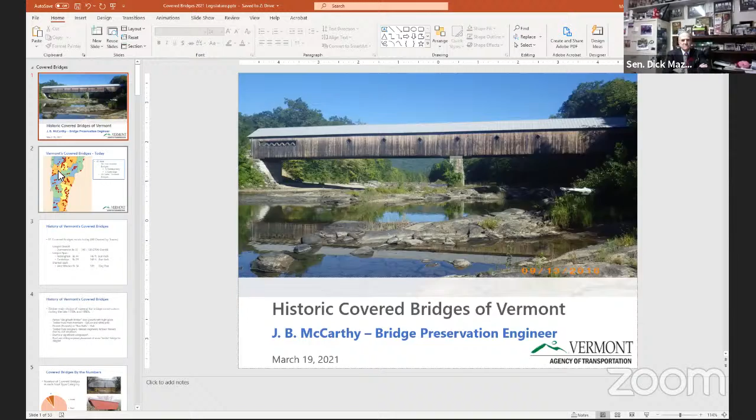Here's the location of the covered bridges around the state, and it's pretty scattered. They're pretty much everywhere, easy to find. You see 81 of them. There's 81 covered bridges. You can Google them and find them, it'll take you right to most of them if you want to see. People want to see them, and a lot of tourists do that.

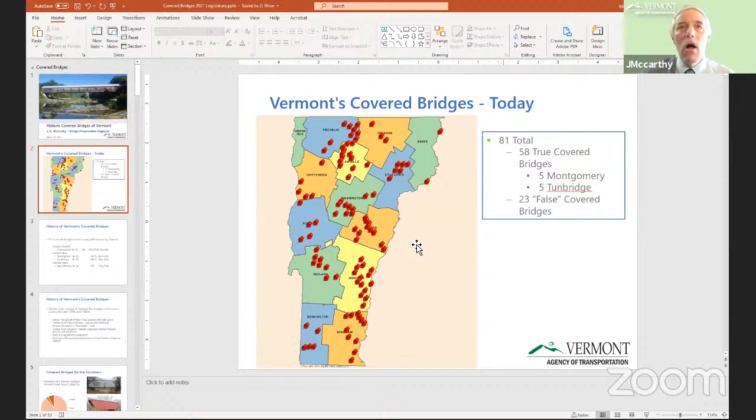We break it into two categories: there's true covered bridges, and what we call false covered bridges, because they have a supplemental force system underneath to carry the heavier loads, because it's on that type of road where the town would like to have that capability. These are all owned by the towns. The state of Vermont does not own any of these.

The longest covered bridge is the one on the front cover, in Dummerston. It's 270 feet. The record was the Townshend covered bridge, I'll show you at the end of the PowerPoint. It was 277 feet, it was closed for a while, it's just been rehabbed, I'll show you a picture at the end. The longest spans are in Rockingham and Cambridge, they're 146 feet, just one span. And the shortest span is a 32-footer up in West Windsor. It pretty much runs the gamut.

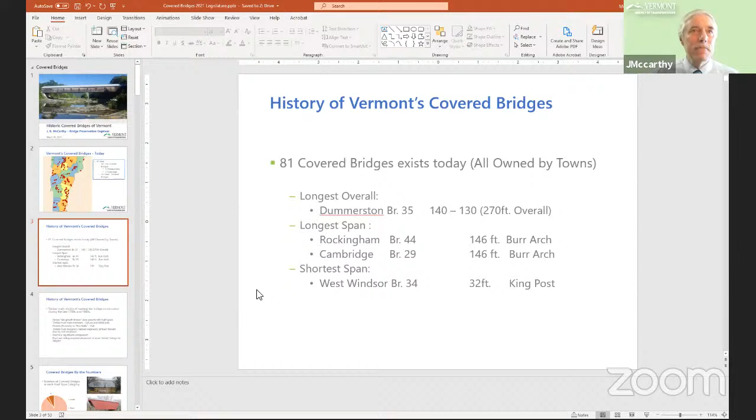These were built, started building these covered bridges and timber bridges in the 1700s and 1800s. There was a lot of good old growth in Vermont, good tight grain, good timber, mainly spruce and white pine. A lot of these bridges still have some of these original members in them. The members were connected with dowels, called tree nails, mainly made of oak. A lot of variety of people built these - timber designers, people that built barns and houses, framers, that type of thing. The railroad, of course, had a lot of timber bridges.

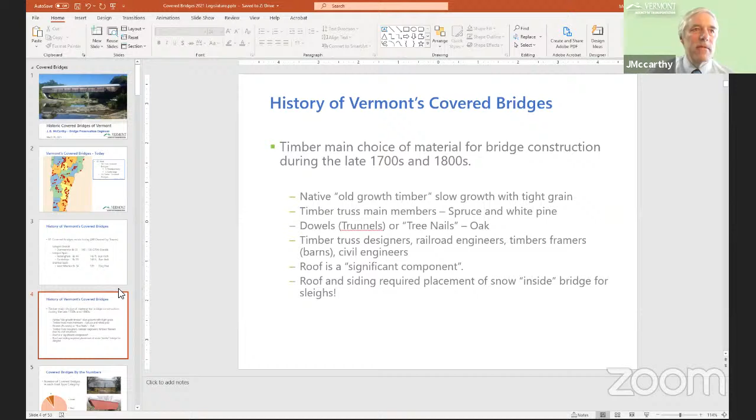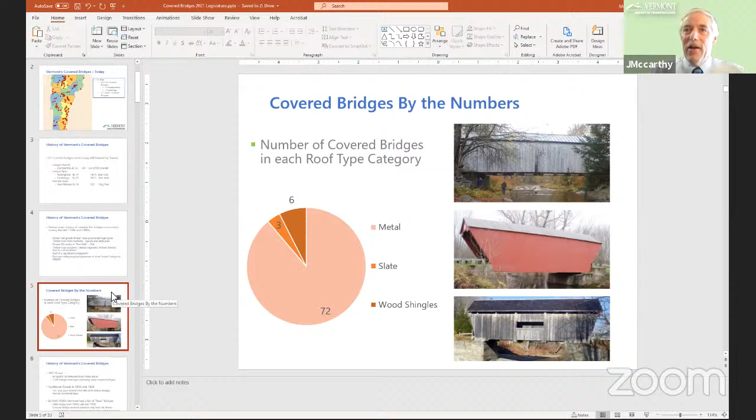I just want to touch on the roof, how significant and important the roof is on these things. It's the main reason these things have lasted - they're protected from the elements, and it makes a big difference on their longevity. Most of the bridges now, we've been able to get the standing seam metal roof on the bridges. The snow slides off, gets the snow loads off of there, and it's rather light compared to shingles, or even a few bridges left with slate roofs. Snow slides off the slate, but the slate's pretty heavy. So the dead load of covered bridges is significant - they're pretty heavy compared to what they can carry, but that's just kind of characteristic of them.

Of course we lost a lot of bridges. There were a lot of timber bridges in Vermont, mainly all of them. Prior to the '27 flood, we lost 1,200 bridges, lost some covered bridges, and had another storm in the '36 and '38 time frame.

So we lost about 300 timber bridges between those two storms. Starting in the mid-1930s or so, we had a lot of new bridges built. A lot of the bridges you see come through the regular program on state highways were built then, and a lot of covered bridges were put back.

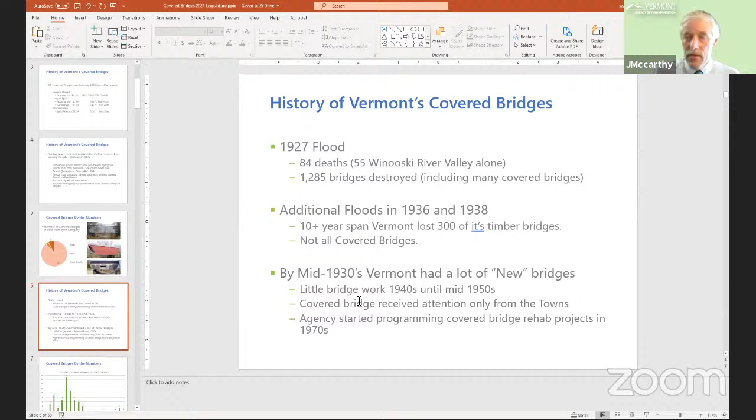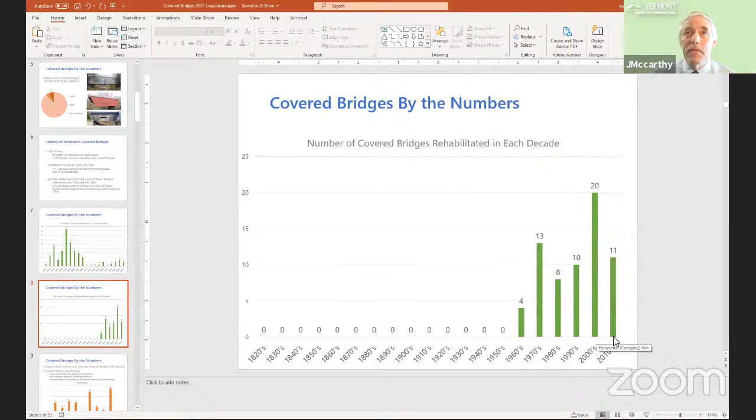And then a sprinkling of new ones throughout the 60s, 70s, and the last few years. These are the number of bridges we've rehabilitated, had projects on since the 60s, and quite a few in the 2000s. There was some additional funding from Federal Highway that really helped in doing this work.

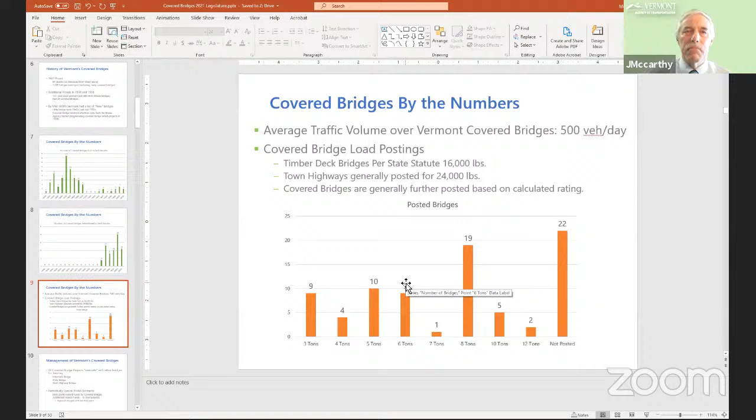These ones at the end that are not posted are the bridges that have steel beams or something underneath because the town desired the standard loading that these roads could take. There's not a lot of traffic on most of these bridges. Another reason they've lasted so long, besides the roofs, is there's about an average of 500 vehicles a day where these bridges are located.

These bridges compete with every other bridge - interstate bridges, state bridges, and other town highway bridges - for funding. They don't have their own separate funding source, which is something we always try to talk about. Maybe we can get a separate line item for these things. But we've done well over the last 20 years, and a lot of them are in pretty good shape.

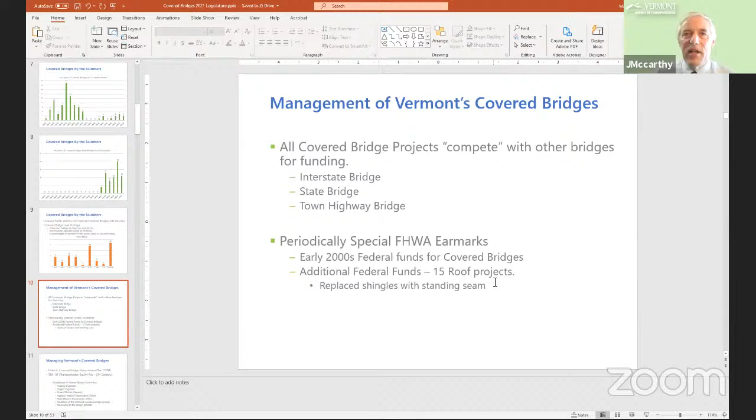We did have some specific money in the 2000s, and we placed 15 new roofs. Didn't do much else besides get a new roof on it, which was a big help.

We have a committee that was set up because of the TEA-21 federal authorization bill. So we have a committee that reviews all projects that come through, made up of our designers, our project managers, the town officials because they own the bridge, a historic preservation officer, and people from the Vermont Covered Bridge Society, which is pretty active. They have probably the best record of the covered bridges out there and what's going on with them.

So they get involved. We meet early on, and the project engineer and designer tells us what's going to happen, and we all agree. We don't vote on things - it's not that hard and fast, but we have some lively discussions and come to a consensus. And I chair that committee.

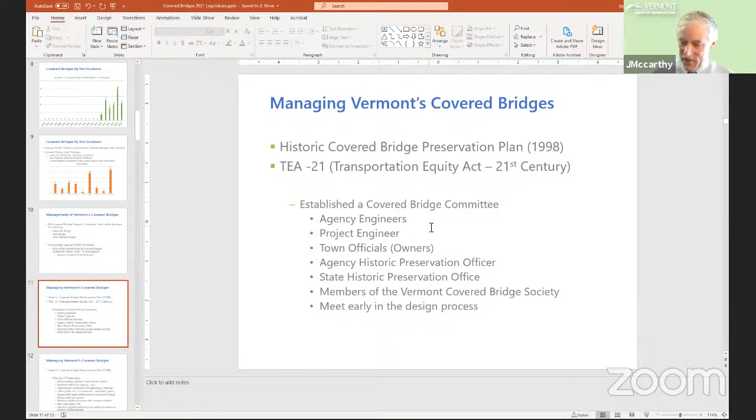So we have a list of treatments that we do on these covered bridges. It was part of the covered bridge plan, trying to retain all the existing character of the bridge. So we go from retaining the existing members all the way to putting something of supplemental capacity underneath.

One of the key concepts here is that anything we do, we'd like to have it be reversible. So if we add something that really reinforces the bridge, and if someday down the road the bridge doesn't need that kind of capacity, that system can be taken out and the bridge can be as it was originally, preserving the historic integrity.

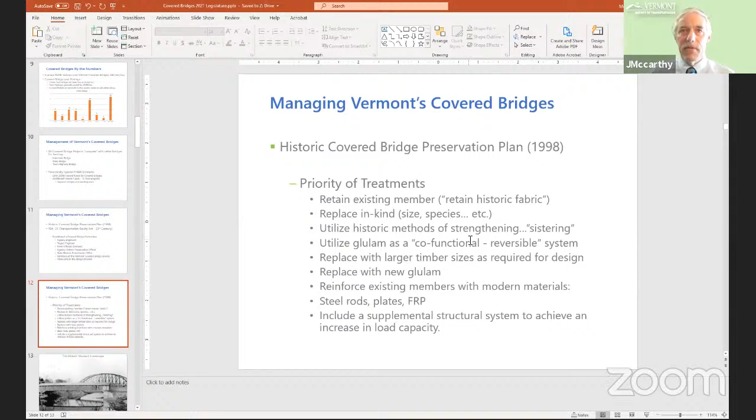So here's a bridge - this is Checker House Bridge, the truss in the background. This is in Richmond, and this was Route 2 on this covered bridge until the Checker House Bridge was built. In between these bridges today, we have 2 barrels of I-89. So it kind of shows how far we've come based on our needs.

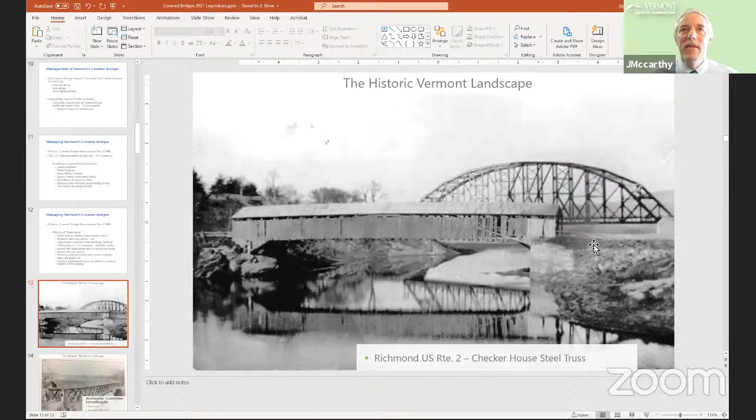This is the Heineberg, the original Heineberg Bridge between Burlington and Colchester across the Winooski River. Look at that - built in 1860, 2 spans. I'm sure it was a very popular way to get north out of Burlington. They built it in 1860 for $5,900.

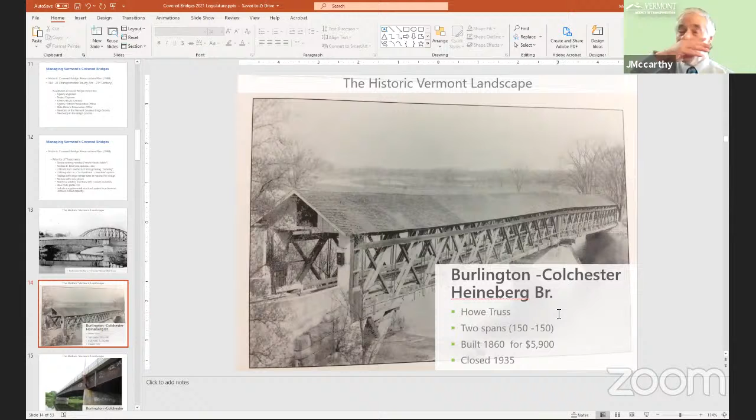So a little bit different today. It was closed in 1935 - that's probably, I think, when they built the first major vehicular Heineberg Bridge. And this is what's out there today at the Heineberg location.

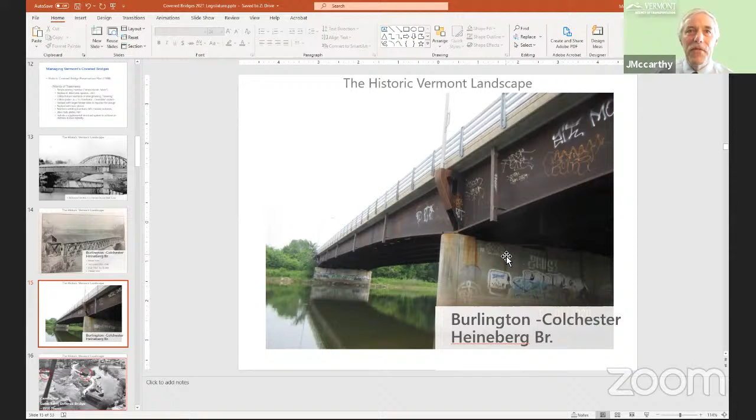So we're going to talk about the locations where things didn't have to change because of the demand for traffic and that type of thing.

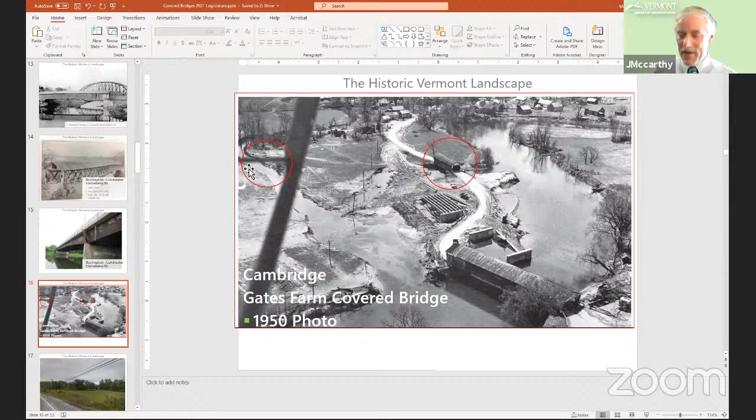So at the time in 1950, the state moved this covered bridge over to the second location, where it exists today, and developed an agreement with him that the state would own and maintain the bridge to provide access to the field that we cut off because we relocated the stream. And there it is today, out on the field.

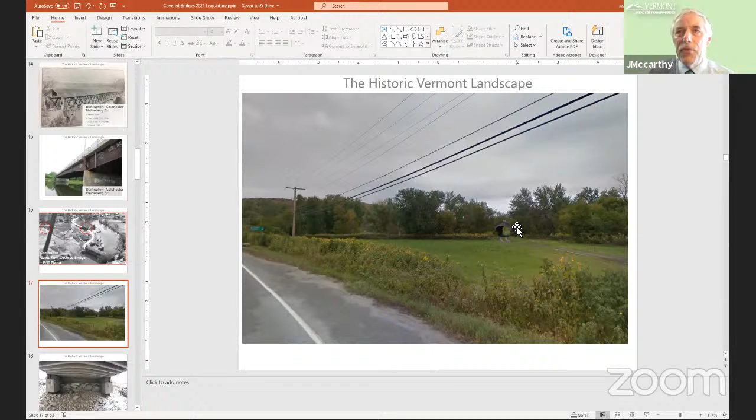In 1995, we did a project to totally reconstruct the covered bridge. We pulled it out in the field, rebuilt it, and put it back. But one thing we didn't do at the time, because it wasn't needed, was take a look at the foundation. All they did was put 2 concrete caps on timber piles, which is how the Vermont 15 bridge was built - on timber piles - and put it in place.

But this stream has eroded away and exposed these piles. This is what's left of one of the timber piles, and you can see up in the concrete above where that was the original diameter of it.

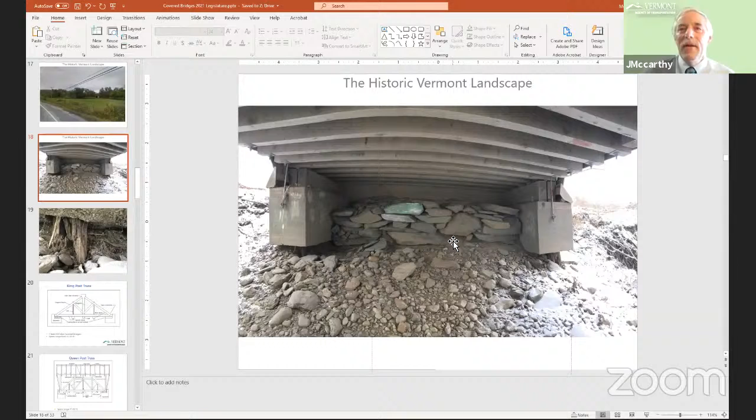So we have a project right now - we're going to go in and stabilize this bridge and try to figure out what to do. It's not in the best place for a covered bridge. The flooding at this site is really controlled by the Lamoille River, and pretty much in the springtime, water gets up over this bridge about 4 feet. So we'll see what we can do here and try to maintain it.

But this bridge is on the National Register of Historic Places, and people come and visit it, and the farmer's fine with it. There's been weddings on the bridge and all sorts of things.

So I'm just going to skip through real quick, not to get too technical, but different types of trusses that we have out there for our covered bridges.

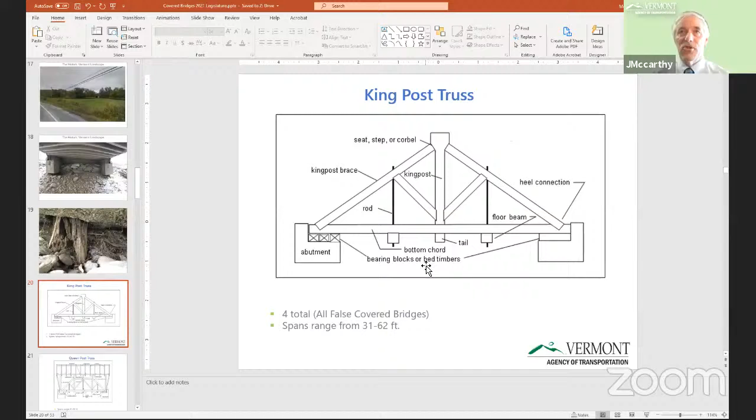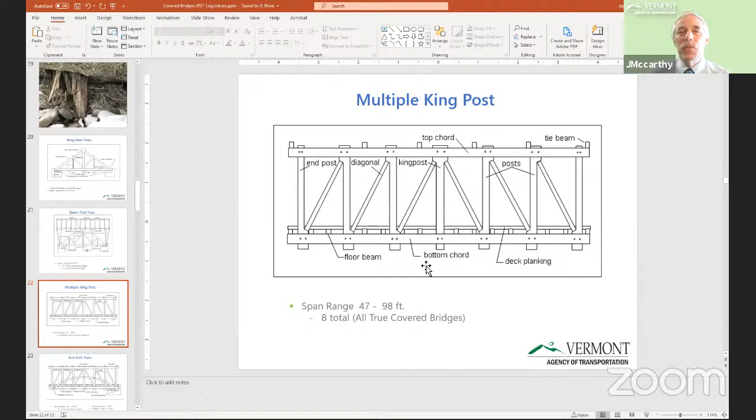These slides all show the number of bridges we have of this type and the span range that it's applicable to. This is for the shorter spans - a little king post truss. Then we go to a queen post, which adds another vertical for a little longer spans. And then you go to multiple king posts, getting up to almost 100 feet. I guess maybe they were having trouble with these and wanted to go longer.

So a fellow down in Massachusetts named Theodore Burr put an arch, tied it into that truss, and it's called a Burr arch. We have a few of those around the state.

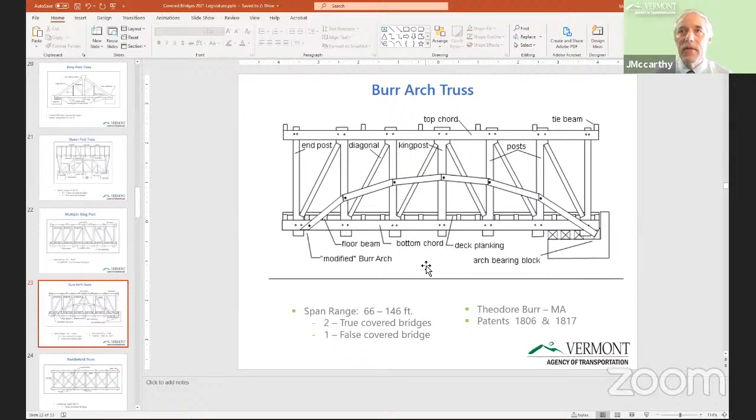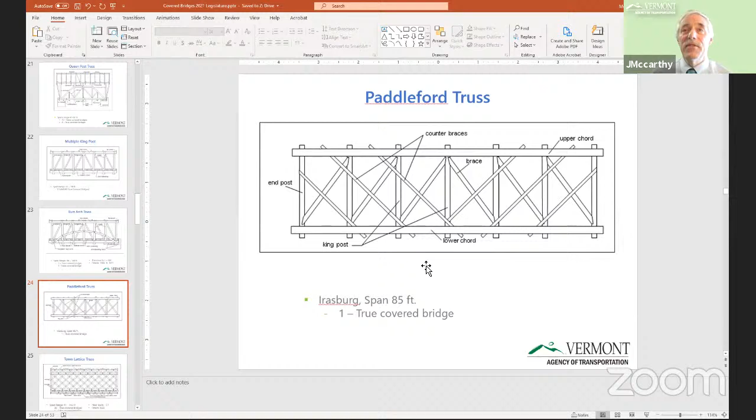There's one unique bridge up in Irasburg, an 85-foot span. It's a Paddleford truss. Doesn't get a lot of traffic. It's in very good condition - the town takes good care of it.

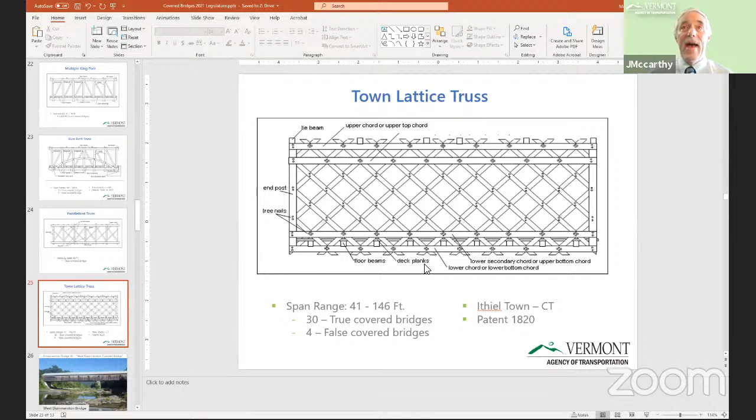But by and far, the most popular one you'll see out here around Vermont is the lattice truss. A fellow by the name of Ithiel Town from Connecticut got a patent on that in 1820. So we have about 35 of those - almost half of the covered bridges out there are of this type. Here's the West Dummerston Bridge that was on the title sheet, built in 1872, did a major rehabilitation in 1998.

The contractor we selected, it was his first job with the agency. He had done a lot of work with churches and barns and other timber things, but he hadn't done a covered bridge, and we were a little bit nervous about having him start on this type of bridge, but he did a tremendous job.

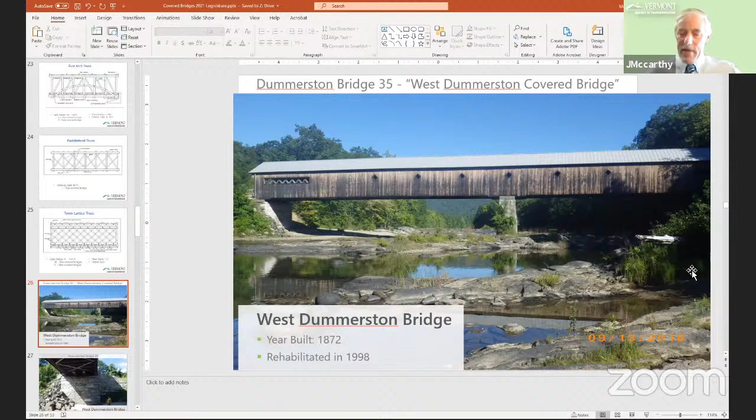This bridge gets a lot of traffic because it's kind of a shortcut. If you're coming down 89, or 91, you get off in Putney and go up over the hill, come across this bridge to get on Vermont 30 if you're headed north. Saves going down into Brattleboro. So it gets a lot of traffic. It's a 1-lane bridge.

Something that doesn't get a lot of attention with these covered bridges is the foundations. Most of them are all laid up stone. When we did this bridge, we did some repointing and work on these things, but these guys did a tremendous job when they built these. We put some stone fill around this corner to protect the flow when it gets up to higher levels. These things are really well built, and they've held up over time.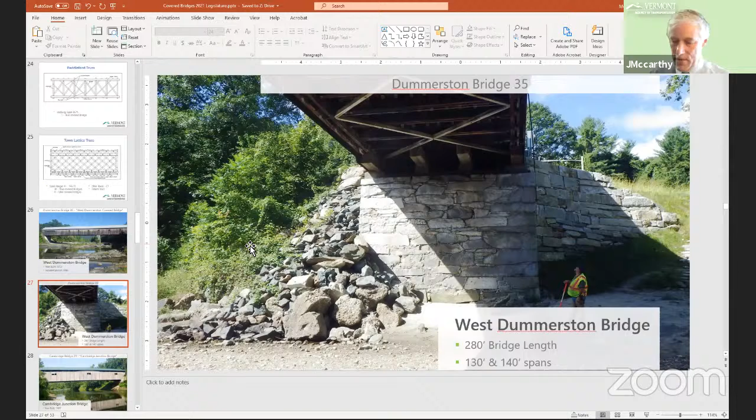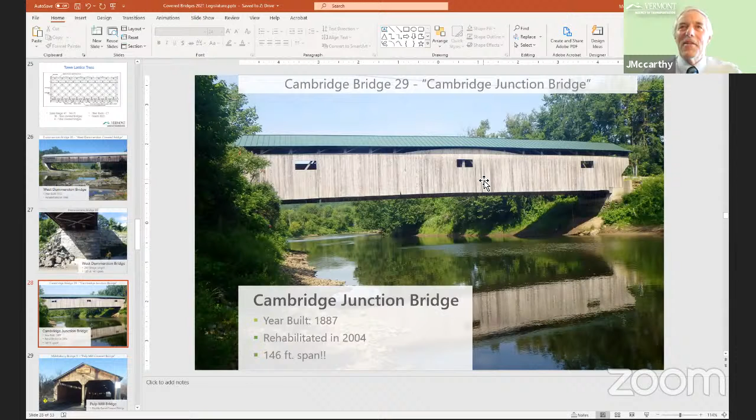This is the Cambridge Junction covered bridge. It's at the end of a bridge, part of the Lamoille Valley bike trail that goes from Morrisville to Jeffersonville. At one point this bridge was closed, and we went out there to do a project in the early 2000s. We ran a string from one end to the other and measured a 17-inch sag in this bridge. It really needed a lot of work, but we got it back in shape. It's open to cars again today. This is pretty much 146 feet, and it pretty much reaches the maximum span for this type of covered bridge.

Are all covered bridges mostly one lane traffic? Yep, most of them are about 12, 15 feet wide, 1 lane. Gets a little cozy with pedestrians going through there. This is down in Middlebury.

This is, I think, the only other one other than the bridge that was in Cambridge. It's now at the Shelburne Museum. It's a double barrel covered bridge. We did a big rehab project on this in 2012. It was built in 1853. It's got lights in here at night, and going through it is very nice.

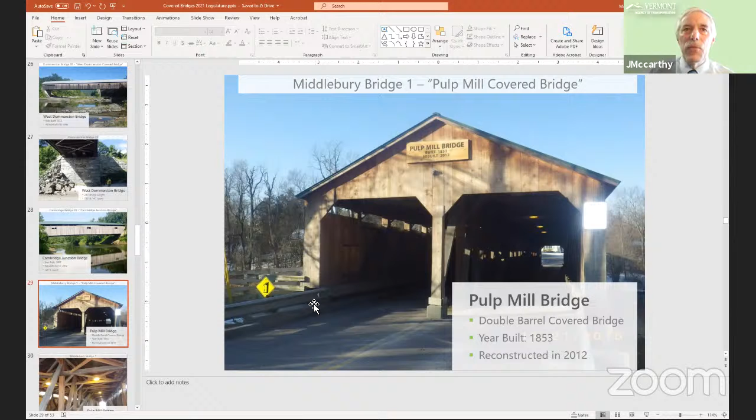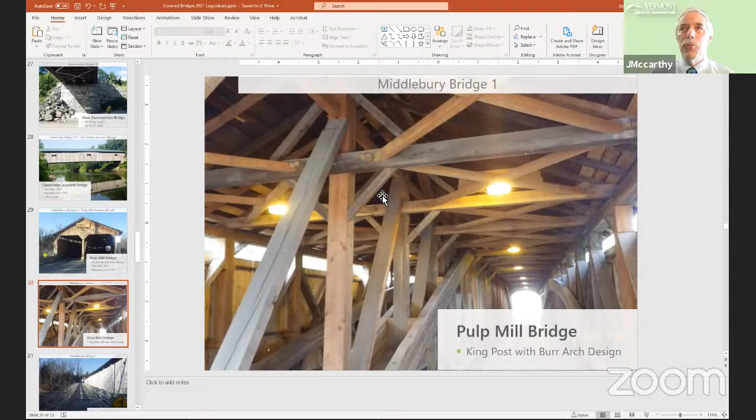Here's inside, a lot of framework. This is what I was talking about, the dead weight of these things. They're pretty heavy. That's why they can't carry a whole lot of weight for vehicles, because the dead weight eats up a lot of the available capacity. But all that bracing is needed to keep things plumb and true. This time we added a sidewalk on the outside when we did this project, because there's no room and it's not safe to walk through either of the barrels.

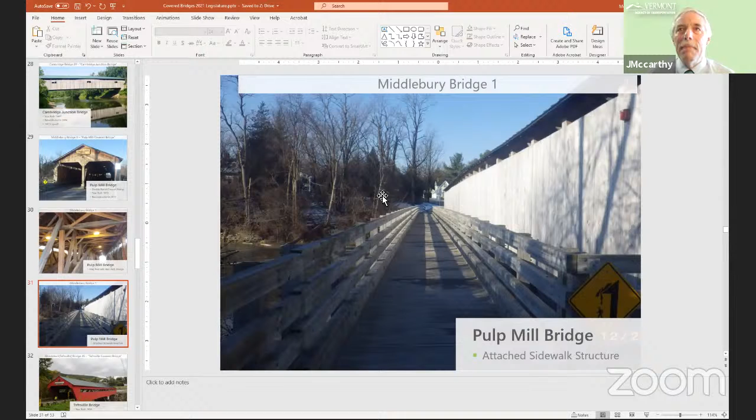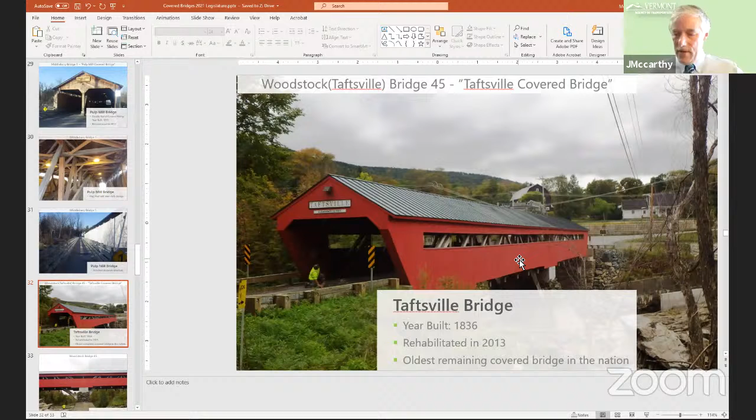This is probably one of my favorite covered bridges in Vermont. This is the Taftsville covered bridge on Route 4, about halfway between Quechee and Woodstock. This bridge also had a big project in 2013. In 2011, when Irene hit, this thing was really tested. The rains were heavy down that part of the state, and the water came up. Just after that went through, we had to brace it up and stabilize it, and then the project came through. We got a new roof and did a lot of work on some interior members. It's really unique, a 2-span bridge, a combination of a truss and arches.

What's kind of historic and nice about these arches is they come in at different angles, something you'd never design today if you were sitting down starting to design something, but that's what they did. These spans aren't equal, they're different spans, but this stone pier has held up for a long time.

We brought in a grouting consultant out of New York City. They do a lot of work down there. The buildings down there that have stone facades on them are coming loose over time. This guy had tremendous knowledge on grout. We wanted to get the right grout, and we pumped it down in between these stones to stabilize everything and tie it all together. So it's in pretty good shape now, and it gets quite a bit of traffic.

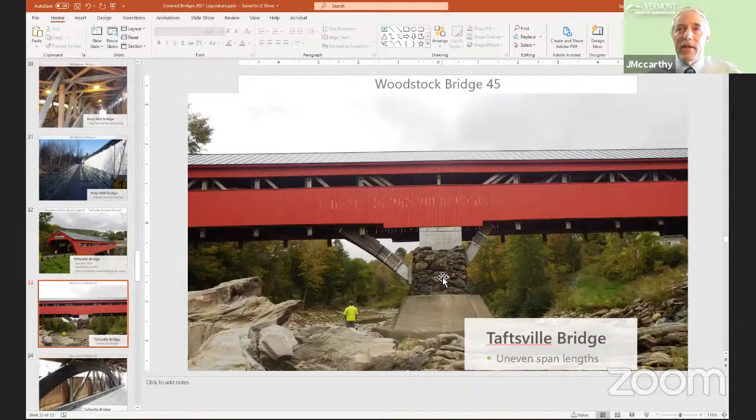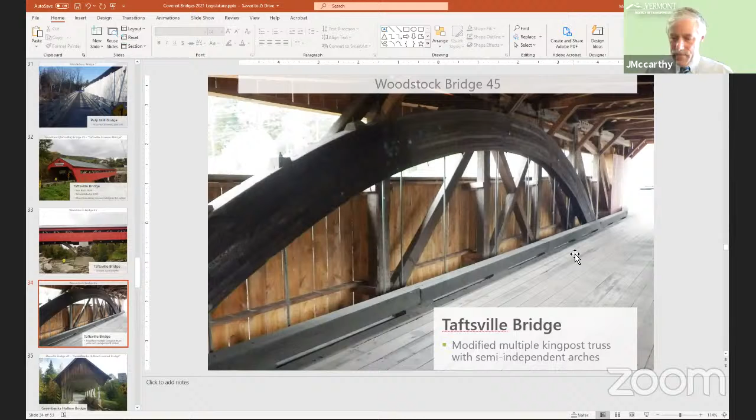Here's the inside of it. These are our original arches, and the rods go down and hold up the floor system. I think it's my favorite bridge. This one is probably number 2.

It's a beautiful little enclave, and it used to be a woolen mill owned by Greenbanks. Now it's a really historic picnic area, a lovely little enclave, but it's off the beaten path, I can tell you.

Isn't there something just below that too, Jane, something to do with the Willow Mill, some old stonework? Yes, and there's a historic sign, a historic site. It's a lovely little area, and there's some remaining stonework from the mills.

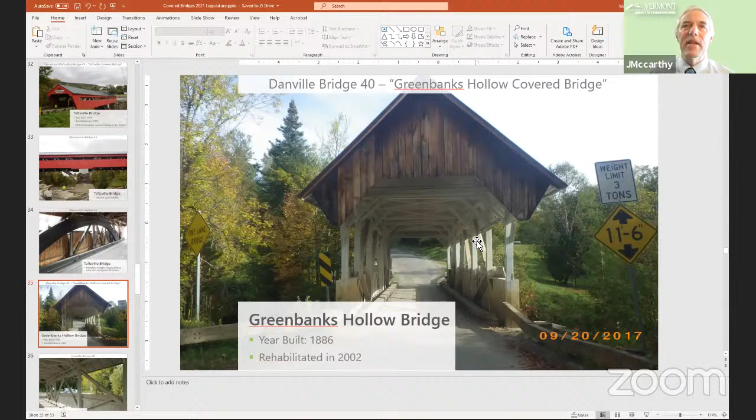It's kind of unique because it's open versus the other covered bridges that have siding. The town keeps it painted, which is a good idea, and it looks very nice. Here's a picture of the inside.

There must be a lot of damage to these bridges by trucks being too high, too wide, or too heavy. I bet the height must mess up a lot of folks. They get hit every year, and even more often now, as truckers use their Google Maps to get around, and it doesn't tell them there's a covered bridge on the road. They try to go through and break a lot of the cross beams.

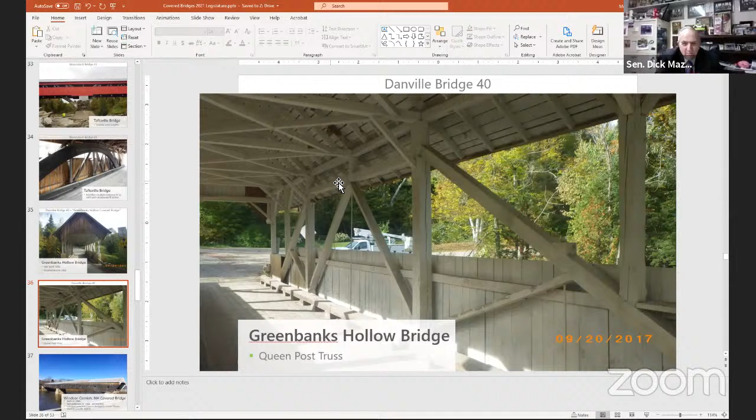So it's a real piece of art. It's really something. If you haven't been there, everybody needs to go down and walk across this bridge. That's what it looks like today.

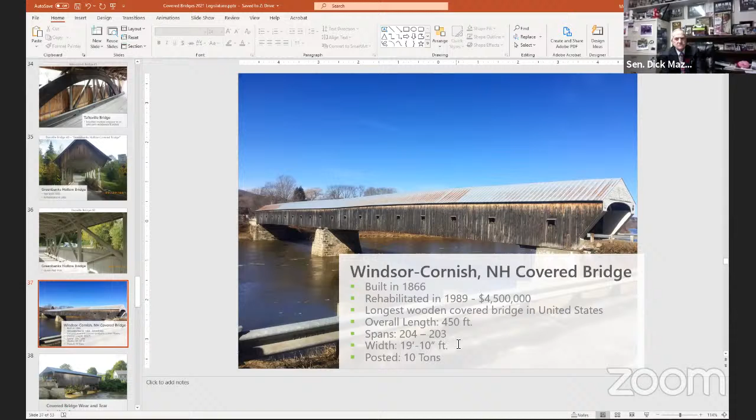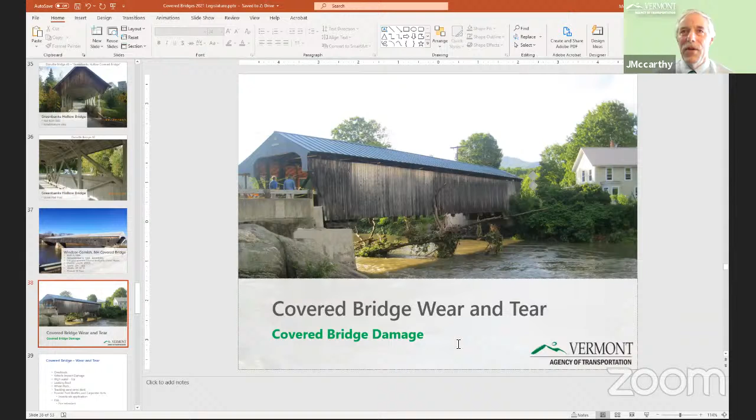So, these bridges have been around a long time, but what are the things that threaten them? This is in Waitsfield Village, and the Mad River comes up when we get a lot of rain pretty quickly, carries trees that come down and hit the bridges.

You mentioned overloads and vehicle impact damage. Ice comes up too. They situated these things back in the day just high enough to stay above the ice, but now they get hit more and more. Leaking roofs were a big problem for a long time, but I think we've got a lot of good roofs on these things now to protect them.

Powder post beetles are a big deal. Inspectors find that damage all the time, and when we do our projects, we put insecticide and fire retardant on the main carrying members.

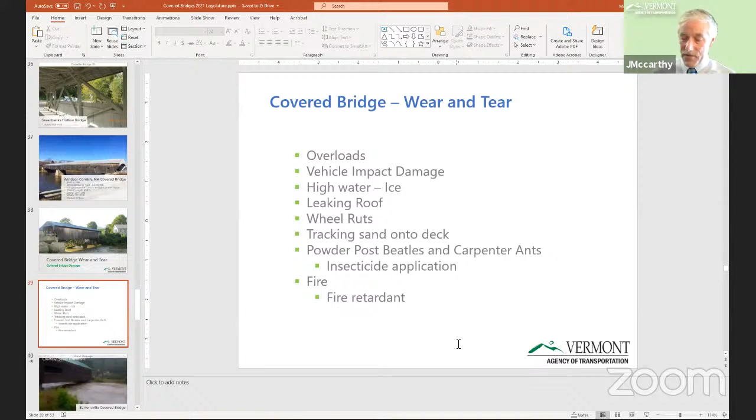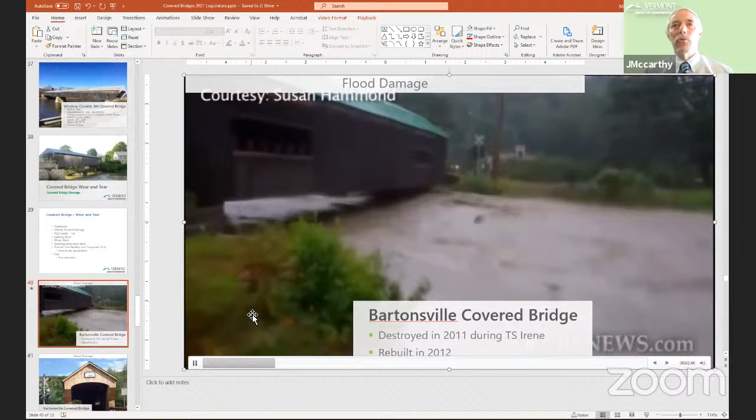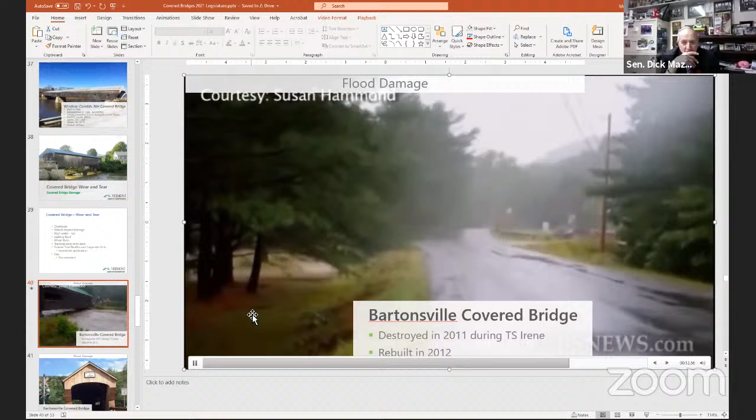Let's see if I can run this. Everybody's probably seen this. This is the Bartonsville covered bridge that we lost in Irene, which was pretty sad to see. This bridge went down in about 3 seconds here. It's just sad to see something like that get destroyed.

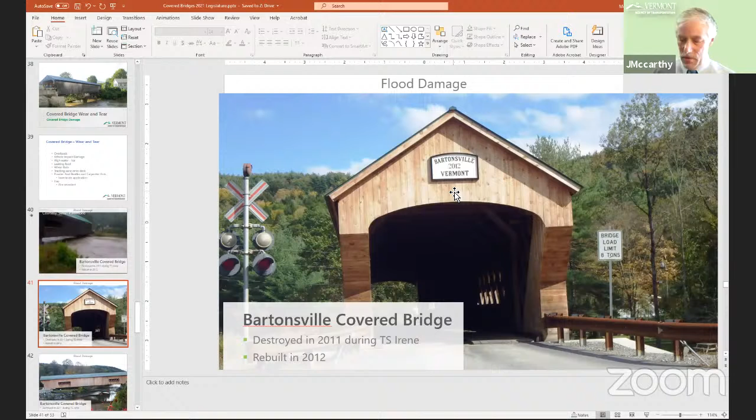But the town built it back. They got some money and some grants, I guess. The fellow who designed this was a guy by the name of Phil Pierce. He's the person we hired to do a study of all our covered bridges back in the 1990s. He did a tremendous job, pretty much a replica of what was there.

It's nice when these bridges have window openings in them; it adds light to the inside. Otherwise, they get pretty dark even during a sunny day, and it's hard to see if pedestrians are inside. You can see it's starting to weather here. It'll all be silver in a couple of years.

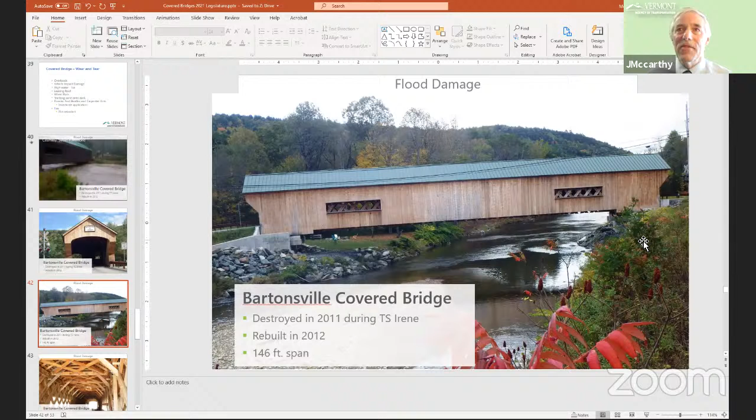But they're brand new abutments. This thing should be there hopefully through the next Irene we have.

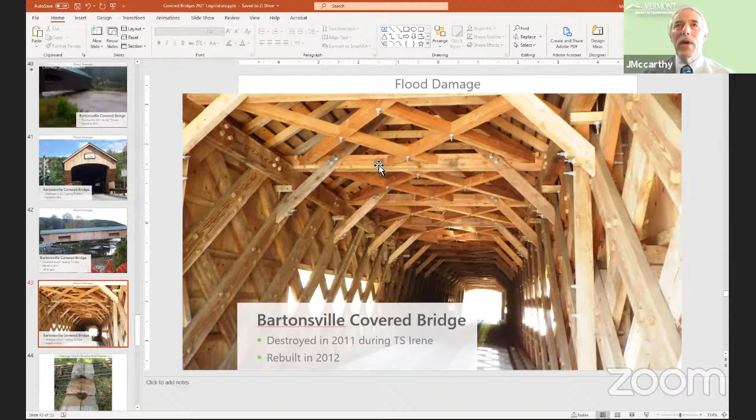This is the big difference today when you design something. Notice the bracing, a lot of bracing in the top part of the roof for the top chord, which they didn't have in a lot of the other covered bridges. A lot of them ended up sagging or swaying. That bracing is really important to provide stability for these.

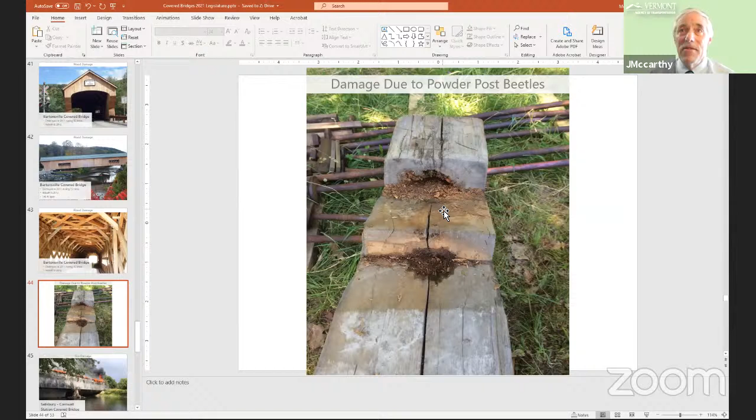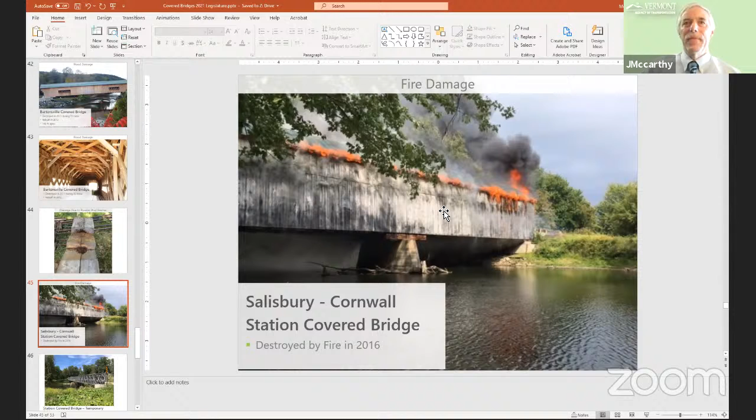And of course, we've had some fires. This is the Salisbury Cornwall Bridge, which had a fire in 2016. I'm not sure if they ever determined what actually caused this fire to start in the middle of the day like this, but the whole thing was lost. We put a temporary bridge in for the town. This job is now a project with the agency, and it's being scoped, and I hope they decide they want a covered bridge back.

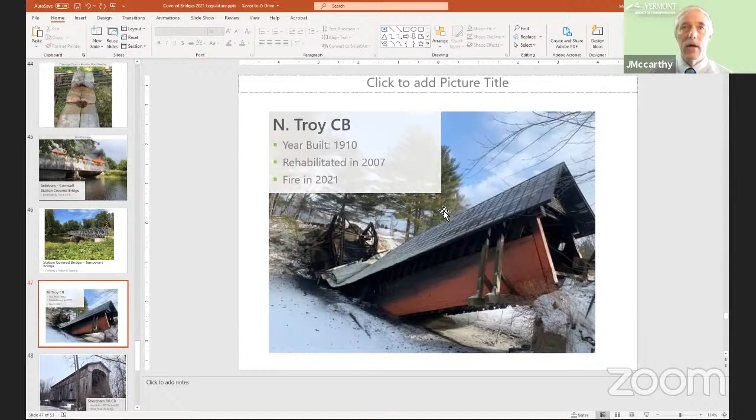Senator Ingalls is going to write a check for it, put his name on it. Well, I do have one bridge in Irasburg that's got our last name on it, so I can't have all the bridges with my name on them. Okay.

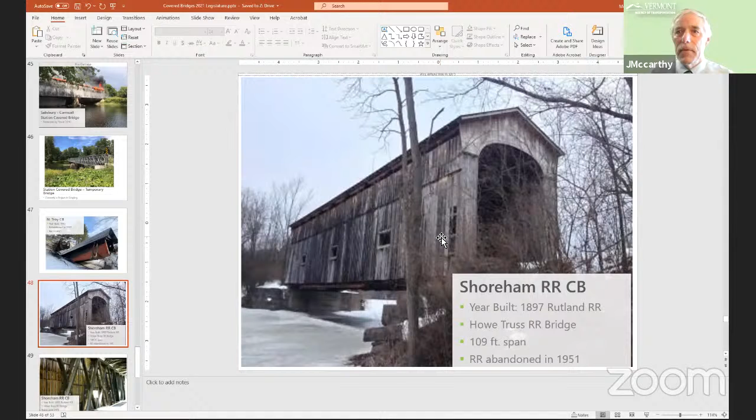We have a couple of railroad covered bridges. This is the one down in Shoreham. No rail line there anymore, obviously, but it's still there, and it's got a path on it. Built in 1897 by the Rutland Railroad, it's a Howe Truss, a little bit different, 109 feet. The last railroad went through there in 1951. There's the inside, and they've got a walkway all built and everything.

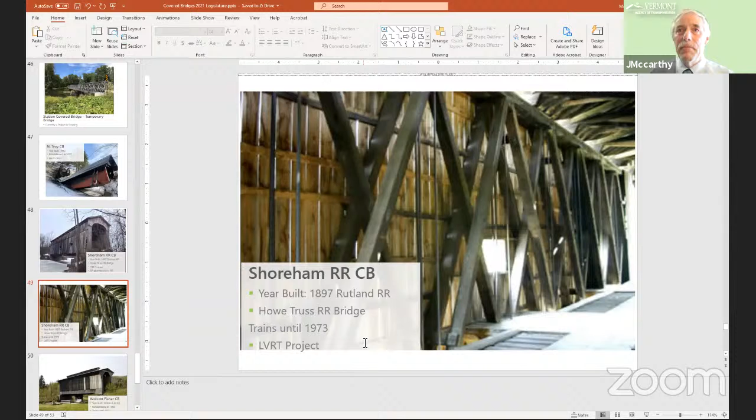There's projects going on right now. You probably saw a request for funding come through to fix up the Lamoille Valley Rail Trail and open it up to snowmobiles and bike path use. We've been having some meetings on this covered bridge. It's historic, owned by the Division for Historic Preservation, but we have an agreement with them to maintain it. Hasn't needed much work to maintain.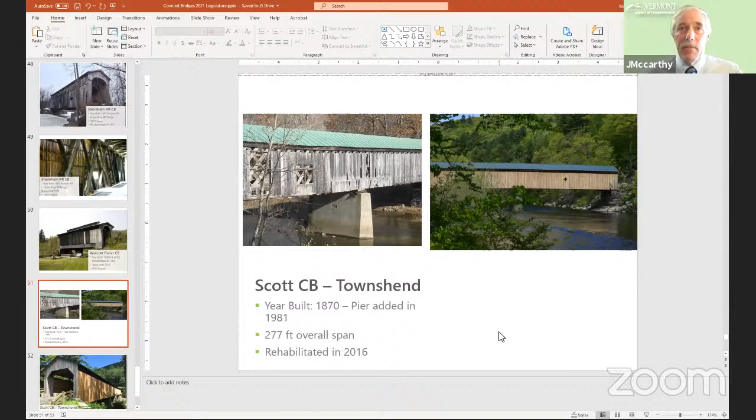In 1981, we went in and put this pier in the river to hold this up. Otherwise, I don't think this bridge would be here anymore. The major project to rehab it was done in 2016, and there it is today.

Funny little story: when they had a grand opening here, they had a band and a whole bunch of people on this bridge. I think Kristen Higgins from our structures office went down for that opening, and people were dancing and jumping up and down on the bridge.

She got a little concerned, so we came back and had a consultant do this design. We had him do an analysis of how many people should be on this bridge jumping up and down and dancing, that type of thing. He only came up with about 60 people. I think there were a lot more than that there that day, but that type of loading can get into a cyclical rhythm.

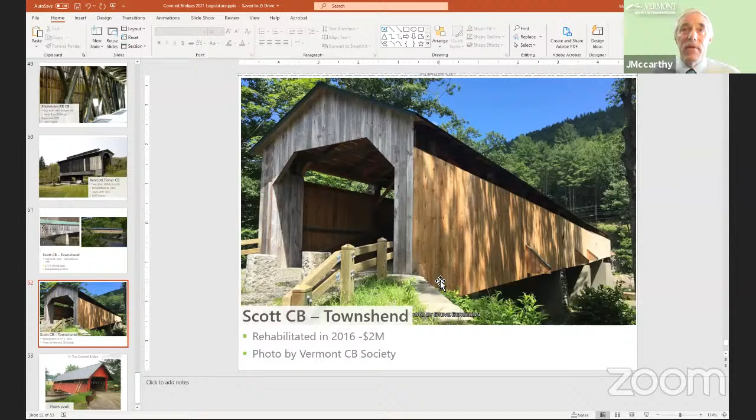So that's all I had. If anybody has any questions.

Any questions or comments? I'm glad we had this overview—I didn't realize we had that many. We probably have more than most states. That's a good question—we're number 4, believe it or not. Pennsylvania has 250 or so, Ohio has close to 200, and Indiana is right up there. Ohio had a program where they were building a new one every year at one point. I'm not sure if they're still doing that.

You said early on the towns maintain these—how do we get involved? They're all owned by the towns, on town highways, most of them class 3 town highways, dirt roads. Their job is to maintain them, and they qualify for funding through federal funds. So they come to us for a project, just like if this was a concrete slab bridge or whatever, they qualify for that.

Yeah, we had a program. A lot of towns, when we offer a project like this, we offer what we call the preservation easement, which lowers the town share, and all future projects are on us. But they have to do certain maintenance—it's not for free. We give them a list of things they should do to keep them in shape so they last. If they do that, and we inspect them every 2 years, we have a record, and their future costs are zero. So it's a good program, a good way to make sure these things stick around for a long time.

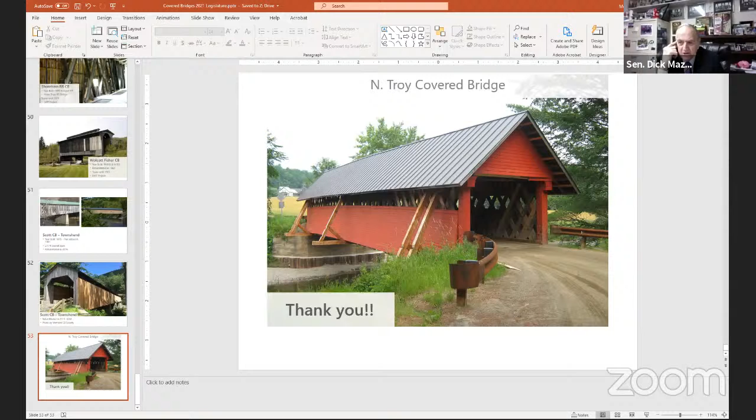Well, thank you, Mr. McCarthy, I appreciate the overview this morning, it was very good. You're welcome, and we appreciate your support. This really is a lot about Vermont right there. Okay, well, thank you, and you—we're on the floor in just a short time, committee. So with that, we're going to sign off, and we'll see you all at 11 o'clock, unless there's any other questions. Yes, Senator Chittenden. Thank you, I was just saying goodbye.